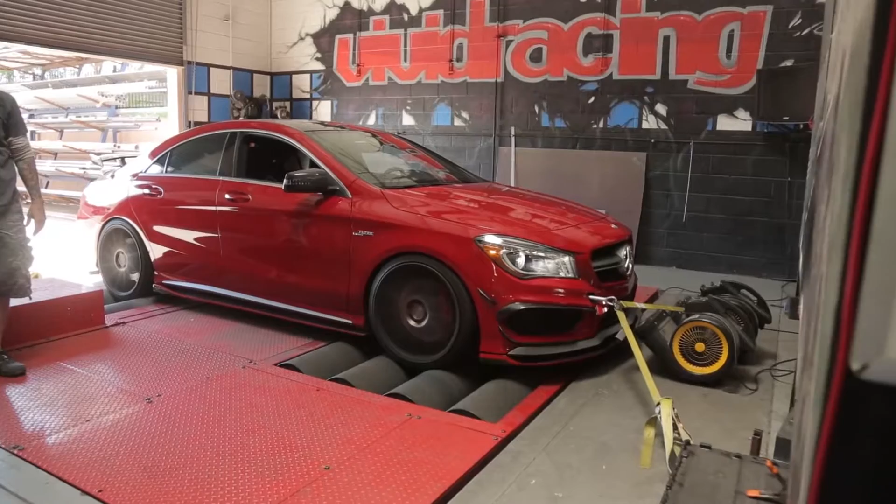Alright, here we are today. We're going to go ahead and dyno the Armytrix turbo back exhaust, and right now we're going to run this in the open mode. 2500 to 6500 test. Here we go.

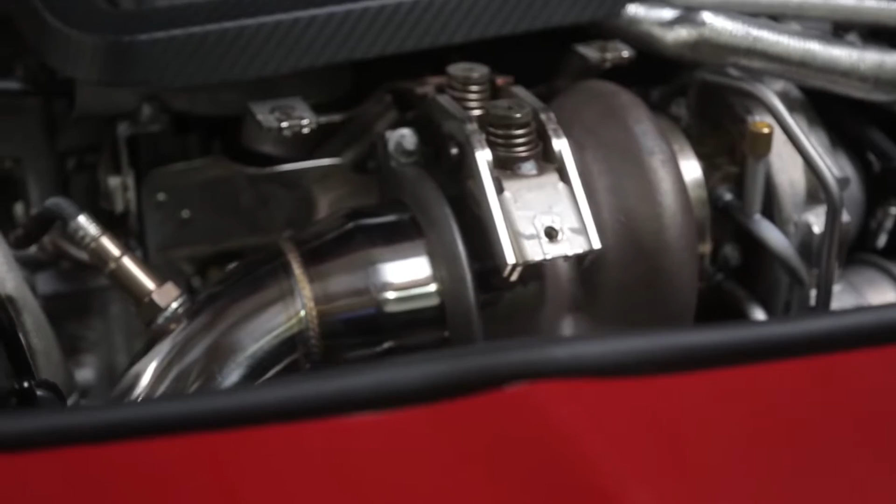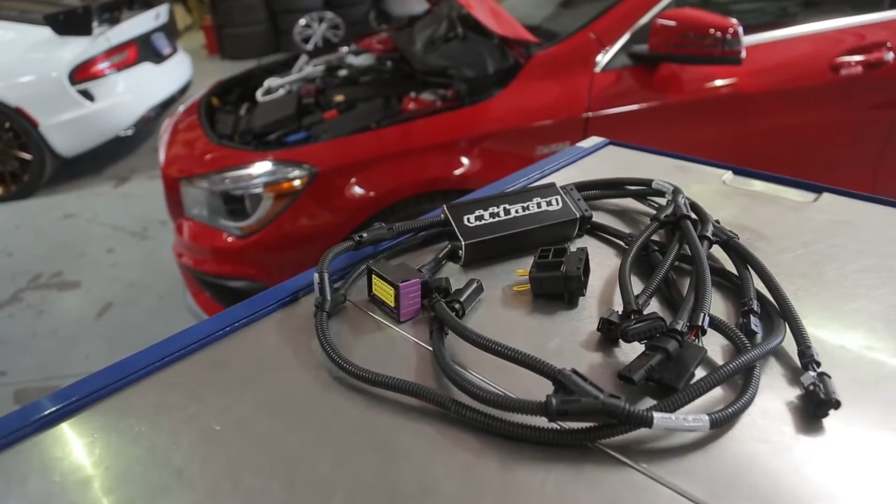We just ran the Armytrix in open mode, which gives it a much louder tone. It's a full turbo back that we're running that does not include a cat, so it's a catless system. On this car as well, we're running our VR Tune ECU tuning box kit and the Weistec anti-surge valve.

We're going to do another run here, probably do 3, get an average, see what the Armytrix exhaust is doing. Again, we're going to run our test from 2500 RPMs to 6500 RPMs, doing a third gear pull with it open. So here we go.

One thing we love about the CLA45 is that awesome downshift noise that it gives. So check this out, going third to second gear. Gives that nice crackle. Sounds beautiful.

So now we've just finished 2 runs with the valves open, and we're going to go ahead and run a third test with the valves closed, just so you can hear the sound difference, as well as we can see how the numbers change with the restrictiveness of having the valves closed.

After we do that test, then we're going to put the tuning box back to stock, so it'll just be showing us completely what the turbo back exhaust does without any ECU tune on its own. So we'll go ahead and run this third test with the valves off. We just use the simple Armytrix remote and press the off button, and it closes those valves.

You can hear when the valves close too, it's a much different noise. We'll put it in neutral just so you can hear the rev up. So it's very quiet and timid with the valves off, compared to when it's open. By pressing the on button, you can hear how much louder it is.

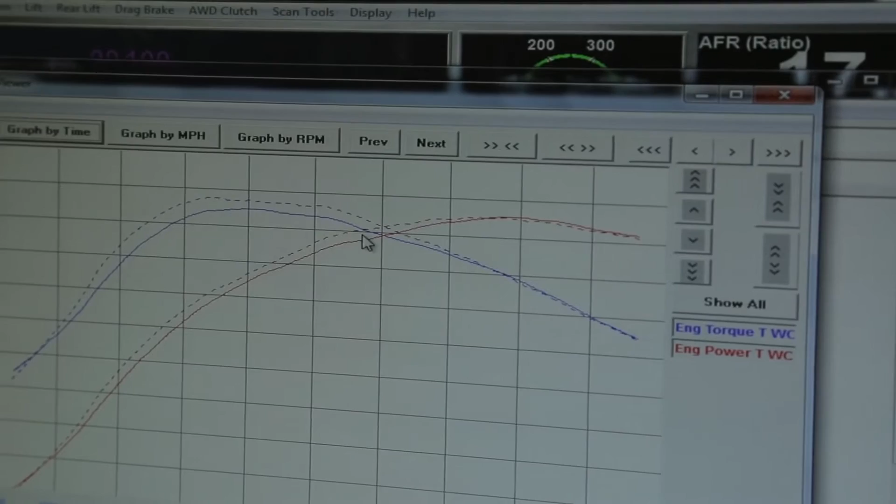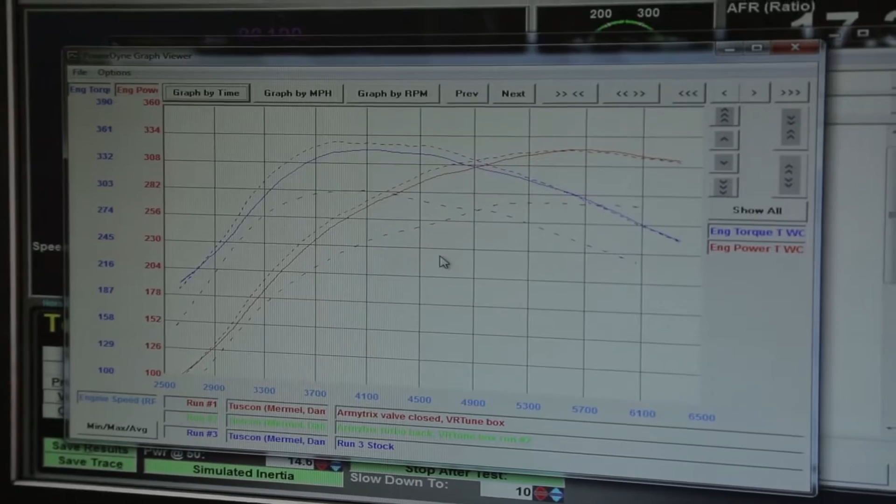So here we have the difference of the car in its stock mode compared to the full turbo back catless Armytrix exhaust, along with the VR Tune ECU tuning box. Huge torque gains compared from the spaced dotted line to the smaller dotted line with the valves open, as well as with the valves closed. And then very consistent horsepower gains all the way to redline.

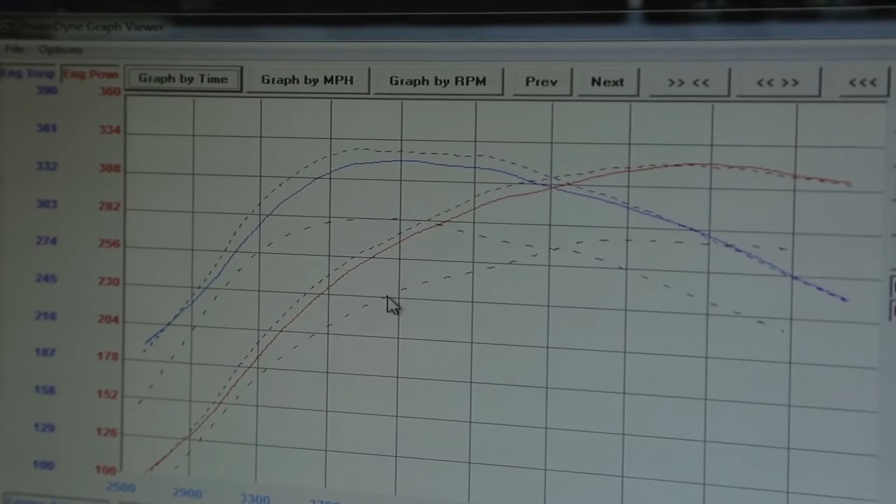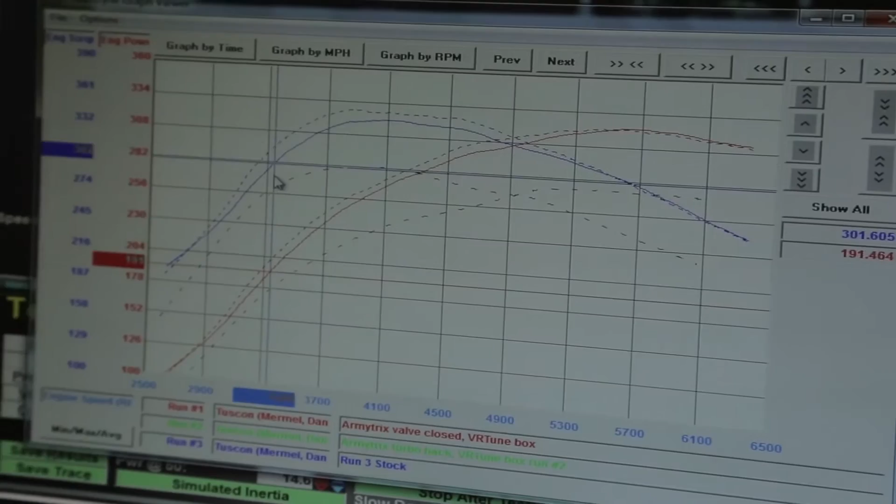Looks like we have about a gain of, as far as horsepower, we're looking at about 317 compared to 273. So that's about a 45 wheel horsepower gain throughout the mid-range all the way to the top RPM. And we have a torque gain of about 350 to 302, so about a 50 pound-foot torque gain.

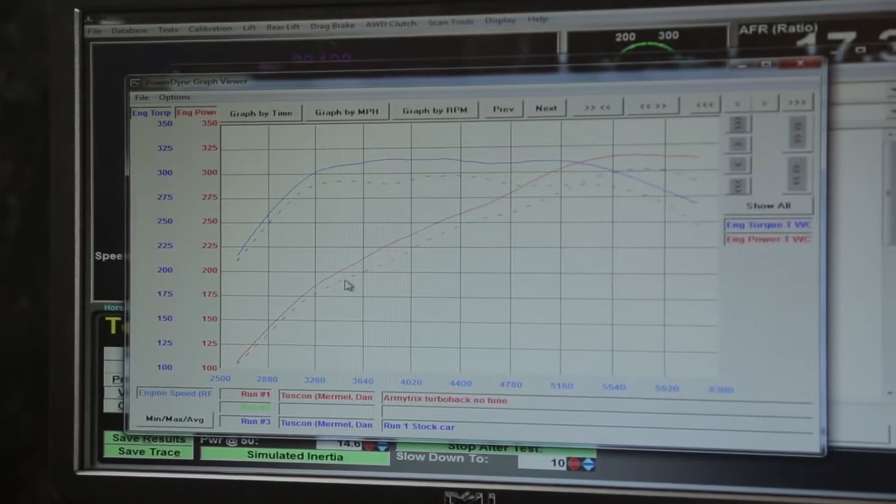So we just completed the test of the Armytrix turbo back exhaust. This is their catless, all stainless steel turbo back with the Valvetronic capabilities. We have our solid line with the exhaust on the CLA45, and the dotted line is the baseline test of the full stock car. Both tests were run in third gear from 2500 RPMs to about 6300 RPMs.

And you can see here that with the Armytrix exhaust, it gained very nice torque and horsepower throughout the entire power curve. Right about 3,200 RPMs is when the differences really start kicking in. If we follow the solid horsepower line, you can see we have here about 308 all-wheel horsepower, and at the same RPM we have about 284. So the exhaust gave us about 20 wheel horsepower. That's all-wheel horsepower, and the Mustang dyno gives us typically about a 20 to 25% drivetrain loss.

Our torque did pretty well. We have some areas in the power curve that have some bigger gains. Right here we went from 314 at about 3,800 RPMs to roughly, let's see, about 289. So here we gained about 25 foot-pounds of torque. And this stayed consistent through the 4,400 to about 5,000 RPM mark was about 20, and then it increased again back to about 25 foot-pounds of torque.

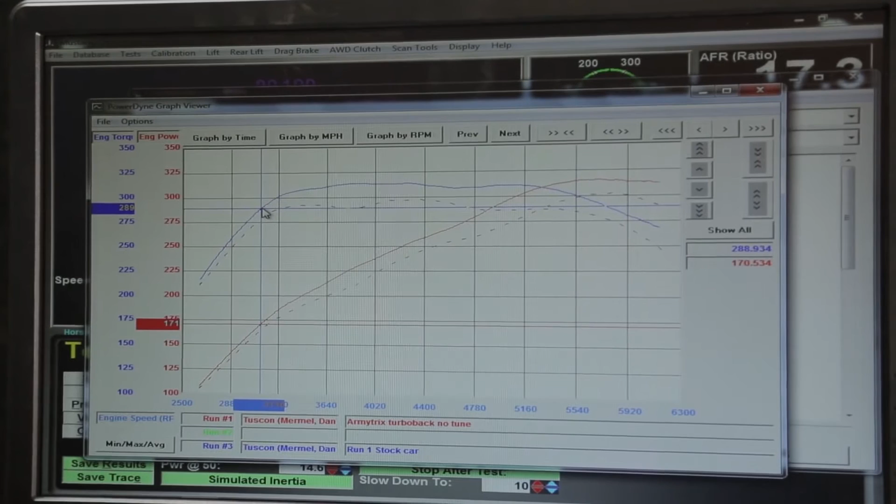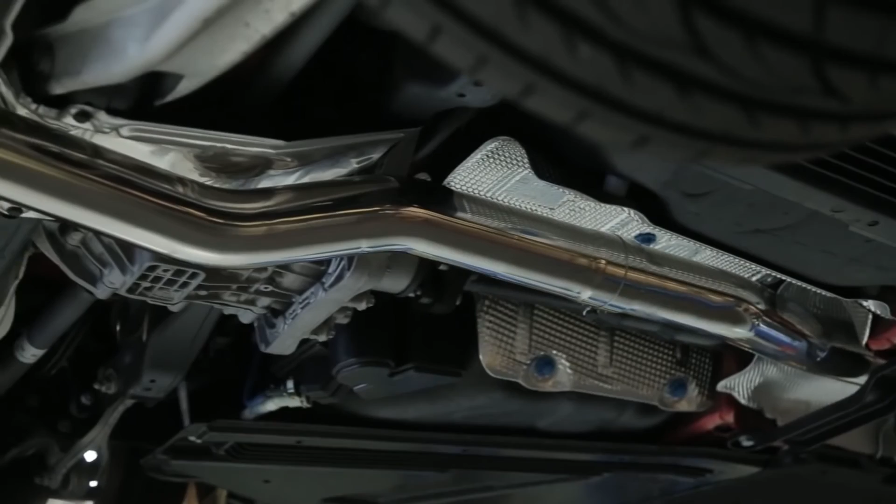So overall, with the valves open on the Armytrix exhaust, we had really good gains through the entire power band. I'm really happy with the sound and the performance of it. Fit and finish is great. Now we can really say that this is a good product if you want to do bolt-on horsepower. No check engine lights, versatility, a great upgrade system for the Mercedes CLA45.